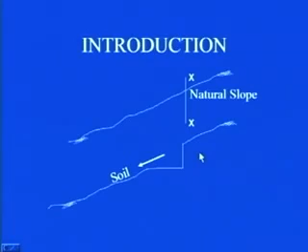Now let us see this. If I give there a retaining structure of this kind, then what is happening? The soil which was there above in this part is creating a lateral pressure which will be resisted by this retaining structure, and that is why it is called a retaining structure.

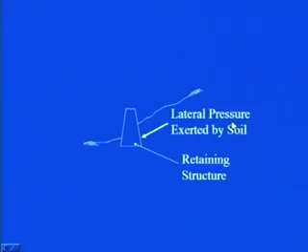So you see that this retaining structure will function properly in the case when this lateral earth pressure is estimated properly, because let's say the lateral earth pressure is very nominal, then we do not need to require such a big cross section of a retaining structure, and accordingly if its magnitude is higher, we have to go for a larger cross section so that the retaining structure will be able to take that much load without failing.

The stability is the only criteria which has to be taken into account. So that is why the estimation of this lateral earth pressure which is exerted by the soil becomes very essential.

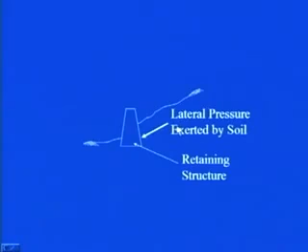Now, I will be using some technical terms from now onwards, so you must know exactly what I mean by those words. I will be using a term backfill. So the soil which has to be retained, that is the soil which is lying in this part by this retaining structure, I will be calling that backfill material or backfill soil.

Now, as we saw what is lateral earth pressure and why it is so important to estimate that properly, to summarize, the proper design of retaining walls, cantilever sheet pile walls, braced cuts and other similar structures require proper estimation of lateral earth pressure. So these are retaining walls or cantilever sheet pile walls, braced cut - they are all different types of retaining structures.

Now, before estimating, we must know on what parameters this lateral earth pressure will vary. So this lateral earth pressure is basically a function of type and amount of wall movement. You have seen that figure, the soil was trying to slide down, which will cause pressure on the wall. The wall will have the tendency to move either towards the soil or away from it. So the type and amount of wall movement taking place will affect the lateral earth pressure.

Then, shear strength parameters of soil. What do we mean by shear strength parameters is the cohesion and angle of internal friction. So depending on the property of the soil, the lateral earth pressure will be varying. Here what do we mean by soil is, as I explained, the backfill soil.

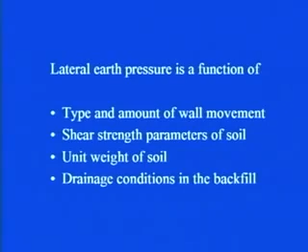As I told you, the wall will have a tendency to move upon the action of this lateral earth pressure, which will be exerted on the retaining structure by the soil. Now there can be three conditions: either the wall is not at all moving, or the wall can move away from the soil, that is away from the backfill, or the wall can move towards the backfill. Let us discuss one by one all these three conditions.

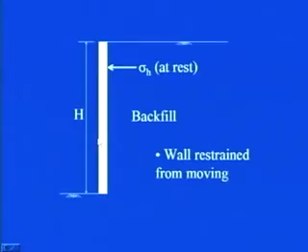First, the condition when the wall is at rest, that is not moving at all. You can see in this figure a retaining structure, and the soil which has to be retained is called backfill. If the height of this structure is h and the wall is restrained from moving, then sigma h is the pressure exerted by the soil on this retaining structure. Keep in mind the wall is not moving at all, it has been restrained, and this horizontal pressure or stress is called sigma h, which is at rest.

Now, the lateral earth pressure on the wall at any depth in this position is called at-rest earth pressure. Is this clear? In this condition, the wall is not at all moving.

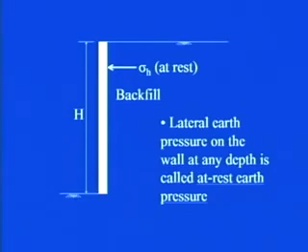So here, the wall may tilt away from the soil which has to be retained. This condition is called the active condition. A triangular soil wedge behind the wall will fail, and the lateral pressure in this condition is known as active earth pressure.

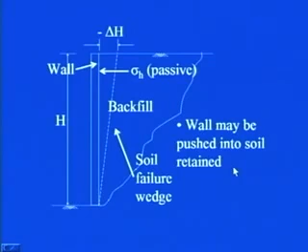So we discussed the condition when the wall is at rest, and the second condition when the wall is moving away from the soil. Now the third condition is when the wall is moving towards the soil. In the earlier figure the wall was moving away from the soil; in this case the wall is moving towards the soil, so the wall may be pushed into the retained soil. There may be various cases, which I will explain in subsequent slides.

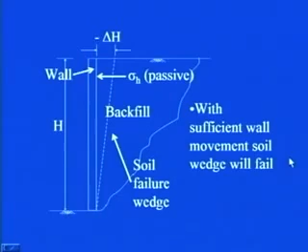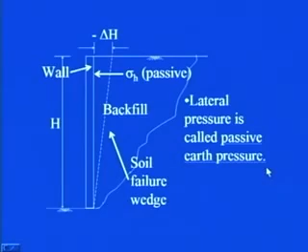In this case the wall is moving towards the backfill soil, and again I assume a triangular soil wedge failure is formed. With sufficient wall movement the soil wedge will fail, and the lateral pressure acting upon the wall or retaining structure by the soil in this case is called passive earth pressure.

Now, after knowing all these three types of lateral earth pressure which can act on a retaining structure due to the presence of backfill, let us analyze each case one by one, to see how exactly we can estimate the lateral earth pressure in these three different conditions.

First, let us look at the estimation of lateral earth pressure at rest condition. Here is the wall, and since it is at rest, it is not moving at all. If I take any soil element at a depth z from the existing ground surface, here is the backfill. If I take a soil element represented by this rectangular part at depth z, then due to the overburden of soil, there will be a vertical stress acting on this soil element, and correspondingly a horizontal stress will act on that element. This is what is called lateral earth pressure.

Now, how to estimate it? First of all, we fix the properties of this soil. So C and phi, those are the shear strength parameters of the soil.

As I told you earlier, the amount of lateral earth pressure depends on the shear strength properties of the soil. These come into picture along with the unit weight of the soil. The height of the wall is h in this case.

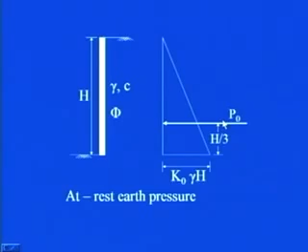This is the pressure diagram, and the total area of it gives you the total earth force. Since it is triangular, its resultant acts at h by 3 from the base of the wall. Now let us try to see what exactly is this K naught.

K naught is called the coefficient of at-rest earth pressure. Many research workers have found these values of K naught based on experiments, engineering judgment, and experience. Jaky in 1944 gave an expression for K naught, which is equal to 1 minus sin phi, where phi is the angle of internal friction.

This expression is for normally consolidated clay. For over consolidated clay, K naught over consolidated is approximately equal to K naught normally consolidated into the square root of the over consolidation ratio.

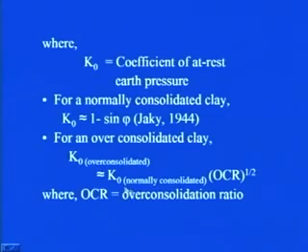I hope you know what exactly is normally consolidated clay and over consolidated clay, but to give you a rough idea: normally consolidated clay is the clay subjected to the maximum pressure in its history, and over consolidated clay has been subjected to more pressure as compared to its present condition in its history. This over consolidation ratio is K naught over consolidated by K naught normally consolidated, whole, squared from this relation.

Now how can we estimate the total force? We have already drawn the pressure diagram. If you take the area of that pressure diagram, you will be able to get the total force. So here we have the total force, which is P naught, and that will be per unit length of the wall.

It can be obtained from the area of the pressure diagram, which is this expression: P naught is equal to 0.5 gamma h square into K naught. As explained earlier, the location of the line of action of this from the bottom of the wall will be h by 3, where h is the vertical height of the wall.

Now we took a very simple case to make you understand what exactly we mean by lateral earth pressure at rest. Many times it may happen that the backfill soil is subjected to some surcharge, possibly due to the existence of some structure, a residential building or something like that. So here I discuss a case with lateral earth pressure in the presence of surcharge.

Here the surcharge, which is Q, has been applied. The condition is exactly similar, all things remaining the same, with only an additional parameter, this surcharge, added to the previous condition. Now let us see what will be its effect on the lateral earth pressure diagram, and subsequently the estimation of lateral force.

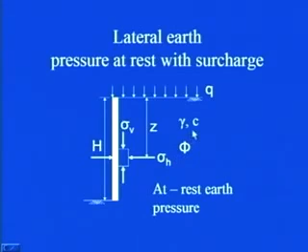If I take any soil element at a depth z from the existing ground surface, then sigma v is acting on this soil, and sigma h is also acting. The properties of the soil are C and phi: C is cohesion, phi is angle of internal friction. h is the vertical height of wall, gamma is unit weight of backfill soil, q is the uniformly distributed load at ground surface, and sigma prime is the effective normal stress.

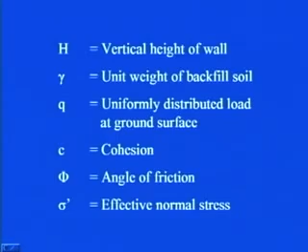Before finding the lateral earth pressure at any particular depth, we need to find the vertical effective pressure at that depth, because if you multiply the vertical effective stress by the coefficient of lateral earth pressure, it will result in the lateral earth pressure. So let us first see what is the vertical subsurface stress at any particular depth z.

Sigma v is equal to q plus gamma z, and the lateral earth pressure at rest, at that particular depth, will be k naught into sigma v prime plus u. Now where is this u coming from?

Here I have not taken into account the presence of a water table. In case of any water table, what will happen? Your total stress will be the sum of effective stress plus the pore water pressure. So this u represents that particular case, which is pore water pressure.

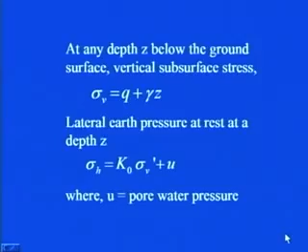So in the absence of any water table, just the surcharge has been added to the previous case as discussed earlier. What is going to be the difference? You see at this depth, that is at z equal to 0, your vertical stress is q.

Now if the vertical stress is q, and the wall is at rest position, what will be the horizontal stress? It will be k naught into q. So here at depth z equal to 0, we plot it to be k naught into q.

Now at depth z, that is at z equal to h, what will this be? Due to this surcharge, the vertical stress at this point, at z equal to h, is going to remain the same, that is q only. So the horizontal stress is also going to remain the same, which is k naught into q.

But due to this backfill soil, this additional part, this triangular part denoted here by area 2, will come into picture. At this depth your vertical stress is gamma h, and if you multiply that by k naught, that gives you the lateral pressure. So the total lateral pressure works out to be k naught into q plus gamma times h.

Now if I take the first one, denoted by this rectangular area, where will the resultant act? It will act at height h by 2. So here I am denoting it by P1. P1 is the force due to this rectangular area, denoted by 1, and this will act at a depth h by 2.

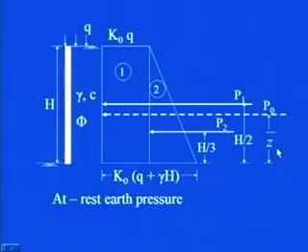So you see, K naught into Q into h, plus, in the similar manner as we discussed when the surcharge was not there, that is plus 0.5 gamma h square into K naught. And the location of the line of action of this force will be z bar. If you take the moment of all three forces about this point, what you get is P1 into h by 2 plus P2 into h by 3, that is equal to P naught into z bar. So from there you will be able to get the expression for z bar.

So this way you can find out what is the total force P naught per unit length of the wall, and its location also.

Now I further complicate the situation by saying that the water table is also present along with the surcharge. We are going step by step: first we saw that in the absence of any surcharge, only the wall and backfill soil were there, and we determined the lateral earth pressure at rest condition. Then we incorporated the surcharge. Now, as a third step, I incorporate the presence of the water table.

This figure shows the position of the water table, at a depth h1 from the ground surface, and the remaining depth is h2, where h2 is h minus h1, with z measured from here. When the water table is present, the soil below it becomes saturated, so its unit weight becomes gamma saturated below the water table, while above it remains gamma. I assume the backfill soil is the same above and below the water table. Now let us see how this affects the methodology for estimating lateral earth pressure.

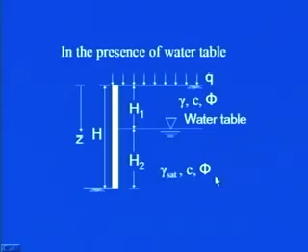Let us see what will be the effect of this water table on the magnitude of lateral earth pressure.

So here I am showing you the earth pressure diagram in which surcharge is present and the water table is also present. First, let's take the case above the water table. The vertical stress at z equals 0 is q only, so the horizontal stress will be K naught into q. I am showing it here.

What will happen at z equals h1? Due to this q, it will remain the same, so it comes as it is. But due to this particular backfill, this extra triangular portion comes into the picture, that is the second one. So what will be this total lateral earth pressure? This will be K naught into Q plus gamma times H1.

Now at this particular level, this will act as a surcharge, so it comes as it is till this point, and then the additional part due to the soil below the water table, of depth H2, this fourth part comes into picture, where we take into account gamma prime, the submerged unit weight, because it is below the water table. So the total amount becomes K naught Q plus gamma H1 plus gamma prime into H2.

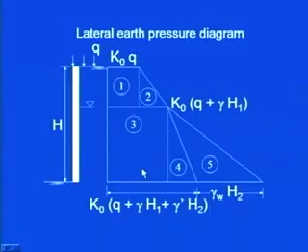See, this is the area of the first part, that is this one. What will be the area of this one? That is half into distance into this distance, okay, so that is here. Then again for the third one, this is K naught into Q plus gamma H1 into this height, that is H2. You see, I am writing this, and in the similar manner I get the two triangular areas for 4 and 5 respectively over here.

Now this was all about your lateral earth pressure in or at rest condition.

Now as we discussed there are 3 conditions: at rest, active earth pressure, and then passive earth pressure. So now let us try to have a look at active earth pressure, that is how we can estimate it. You must remember when this active earth pressure will come into picture: whenever the retaining wall is pushed away from the backfill soil, then your active earth pressure will come into picture. Now various research workers have given different theories to estimate this active earth pressure. Mainly 2 are used, that is Rankine active earth pressure and Coulomb's active earth pressure. Both have some advantage or disadvantage, one has some limitation over the other. We will be discussing all these aspects one by one.

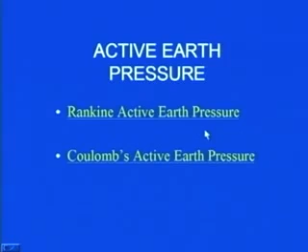So first let us try to see what do we mean by Rankine active earth pressure. So as we say that it is active pressure, you see the wall is moving away from the backfill. Rankine assumed that the rotation of the wall takes place along this point which is at the bottom of the wall, and the failure takes place along this failure plane, which makes an angle of 45 plus phi by 2 with the horizontal. So you see the failure wedge which is getting formed is triangular in nature, that is this one, and delta x is the wall movement away from the soil.

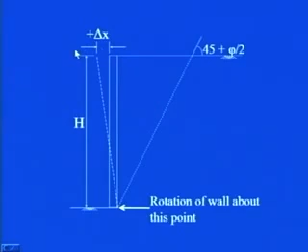So if we plot, let us say normal stress - you have already studied in your soil mechanics course what do you mean by Mohr circle. Now if I plot that Mohr circle, that is the variation of normal stress and shear stress. So you see, if I draw for different conditions the normal stress versus shear stress, we get a circle kind of thing. So at any particular depth, if sigma v is the vertical stress, k naught sigma v - I am talking here of active earth pressure.

You see, the wall was moving away from the soil. So at any particular depth z, if sigma v is the vertical stress, what will happen? As the wall - let us say in the first case the wall will not start moving spontaneously or instantaneously, so for the first case it will be at rest. So in that case what will be your horizontal stress? That will be simply, you have to multiply the vertical stress at that particular depth by k naught. So you see this Mohr circle A, which is the smallest one, is there, which is corresponding to the Mohr circle at rest condition, where the wall is not at all moving.

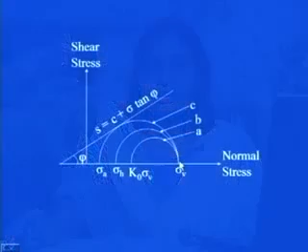Now when the lateral earth pressure started exerting on the wall by the backfill, what will happen? The wall will slowly start tilting away from the soil. So you see, at any particular tilt delta x, I say that this is the second Mohr circle, that the wall has started moving away from the soil. If sigma v is the vertical stress - see, vertical stress is not going to change at that particular depth - so accordingly, corresponding to that wall movement, your sigma h will be changing. So now sigma h will become some particular typical value, and that will be different from the sigma h at rest condition. So the Mohr circle will start moving in this particular direction.

As the movement of the wall increases, there will be one situation where the Mohr circle will touch this Mohr envelope. That means that as soon as it touches the Mohr envelope, the soil has failed. The equation of the Mohr envelope, which you already know, is S is equal to C plus sigma tan phi, where what is S?

S is your shear stress, C is your cohesion, sigma is normal stress, phi is angle of internal friction.

When the wall movement has increased enough that the Mohr circle corresponding to that condition touches the failure envelope, that condition is called the active condition. The horizontal pressure corresponding to that is called sigma A, the active earth pressure. Earlier it was at rest; as the wall movement increases, the Mohr circle shifts in this direction and attains a minimum value of horizontal stress just before failure, which is the active earth pressure.

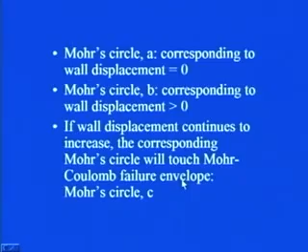I hope that is clear. Please make sure this mechanism is very clear to you, otherwise you will get all types of confusion.

I'll repeat it again: the first Mohr circle corresponding to sigma V and K naught sigma V is the lateral earth pressure at rest condition, when wall displacement is 0. As wall displacement increases, meaning the wall moves away from the soil, the Mohr circle shifts, and a condition comes where the circle touches the failure envelope. That condition corresponds to the failure condition, and the corresponding lateral earth pressure is known as active earth pressure.

Mohr circle C represents the failure condition in soil mass, with corresponding horizontal stress sigma A, where A stands for active condition. This is referred to as Rankine active pressure.

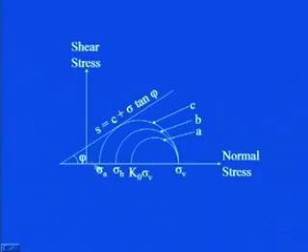In a Mohr circle, two extremes correspond to major and minor principal stress. In this active condition, the major principal stress is sigma V and the minor principal stress is sigma A, the earth pressure corresponding to the active condition.

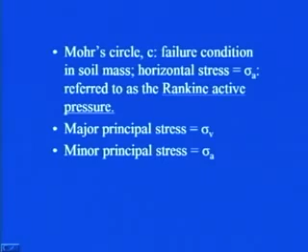As you learned in theory of elasticity at first year level, there is a relation between major and minor principal stress. From that principle, we get the expression for sigma A as sigma V tan square (45 minus phi by 2) minus 2c tan(45 minus phi by 2), which can be simplified as sigma V into Ka minus 2c square root of Ka, where Ka equals tan square(45 minus phi by 2), known as the Rankine active earth pressure coefficient. Just as K naught was the lateral earth pressure coefficient at rest condition, this Ka corresponds to the active earth pressure coefficient, specifically the Rankine active earth pressure coefficient since we are discussing Rankine's theory.

Now, how do we draw the lateral earth pressure diagram? It's always better to draw the earth pressure diagram first, because then problems become simple: you just take the area of the diagram to get the total force per unit length of the wall, and once the area is known, you can find where the different forces act and determine the line of action of the resultant force. So we try to develop the active earth pressure variation with depth in case of Rankine's active earth pressure.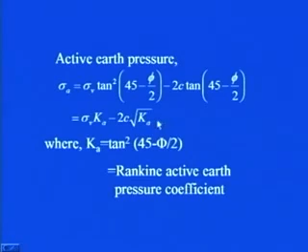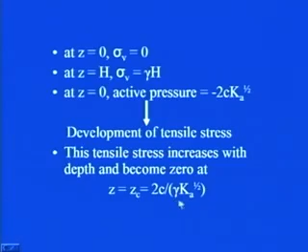Now how am I writing this zc is equal to 2c by gamma square root of Ka? You can see here that your sigma a is equal to sigma v Ka minus 2c square root of Ka. If you substitute this to be equal to 0, and sigma v at z is equal to zc will be gamma into zc, and from there you will be able to get this expression for zc is equal to 2c by gamma square root of Ka, where this Zc is known as the depth of tensile crack. Tensile stress in the soil causes a crack along the soil wall interface.

So you must understand the physical interpretation of active earth pressure becoming 0 at any particular depth. As soon as it is becoming 0, that means above that level there is a development of tensile stress, and so there will be an occurrence of crack on soil and wall interface. That is what we mean by the occurrence of tensile crack. Then there can be two kinds of situations: one just before the occurrence of the tensile crack, and another after the occurrence of the tensile crack.

So first I discuss the Rankine force per unit length of the wall before the occurrence of tensile crack. We were taking the area of the earth pressure diagram to find out the forces. If the area is not well defined, or it is a function of a particular depth, what do we do? We integrate it.

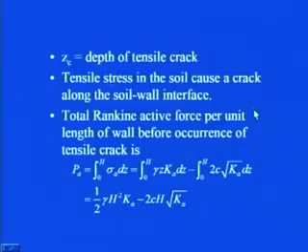So whatever stress occurs after the tensile crack will be equal to the pressure acting on the wall between z equal to Zc and z equal to h. So when finding the Rankine force per unit length of the wall after the occurrence of the tensile crack, we just take into account the earth pressure diagram between depth z equal to Zc and z equal to h.

This is simply expressed as Pa equals h minus 2c upon gamma square root Ka into gamma h Ka minus 2c square root of Ka. Now you must be wondering where this comes from - it's simple. I have just taken the area of this part: half of this length, which is h minus Zc, into the base width of this triangular wedge, which is sigma v Ka minus 2c square root of Ka.

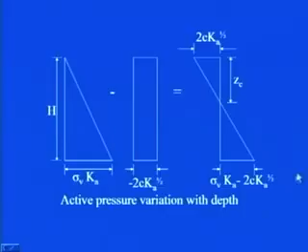What is sigma v at this particular level? It is gamma into h. So that is gamma h Ka minus 2c square root of Ka. You see, exactly the similar thing, h minus Zc - I showed you earlier how to find that, which is 2c by gamma square root of Ka, into gamma h Ka minus 2c square root of Ka. This is how we find the active force due to the movement of the wall away from the backfill soil, as given by the Rankine theory.

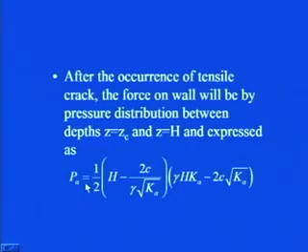Now this theory can also account for the case where the backfill surface is not horizontal, but inclined with the horizontal. Let us have a look at that. So for Rankine active earth pressure with inclined backfill, I assume, as usually adopted in practice, that the backfill soil is cohesionless - that is, purely cohesionless, so C becomes 0. Only phi comes into picture as far as the shear strength properties of the soil are concerned.

So for cohesionless backfill soil, C becomes 0, only phi remains. For inclination of the backfill rising at angle alpha, the only change in the expression is that the active earth pressure coefficient becomes cos alpha into cos alpha minus square root of cos square alpha minus cos square phi, divided by cos alpha plus square root of cos square alpha minus cos square phi.

Earlier what was that? That was simply tan square of (45 minus phi by 2), in case of horizontal backfill. But now when the backfill is inclined at an angle alpha, your Ka expression will become this.

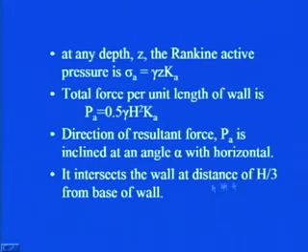The direction of this resultant force Pa will be inclined at an angle alpha with the horizontal, and it intersects the wall at a distance of h by 3 from the base. So as shown in this figure, Pa, the total force in case of an inclined backfill, acts at a distance of h by 3 from the base of the wall, and is parallel to the inclination of the backfill.

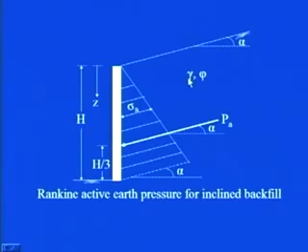So you see with depth how it is changing, and what value it attains at Z equal to h, along with the soil properties gamma and phi.

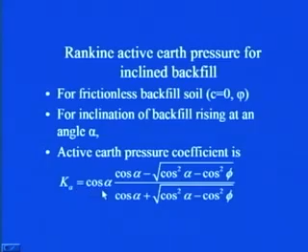Now, this is a very tedious kind of expression, so standard tables are available in standard textbooks which give the value of Ka for different values of alpha and phi. I will show you some typical values in tabular form.

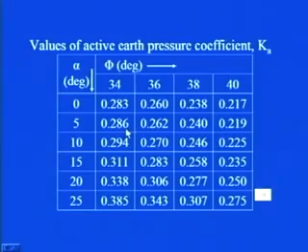All these are in degrees, and since Ka is a coefficient, it is a non-dimensional parameter. If you know the value of alpha, the inclination of the backfill, and the property of the soil, phi, since C is 0 as we assumed frictionless soil...

...then you can simply pick the value of Ka from these standard tables and put it into the expression for total force per unit length of the wall, to get the magnitude of the Rankine active force per unit length of the wall, which will act at a depth of h by 3 from the bottom of the wall.

So today we saw what exactly we mean by lateral earth pressure, how it occurs, how it affects nearby structures, why we need to estimate it properly, and how it affects retaining structure design. We saw three conditions: wall at rest, wall moving away from the soil, and wall moving towards the soil, that is, active and passive conditions respectively.

We saw how the analysis is carried out for determination of lateral earth pressure at rest condition, and then started with estimation of lateral earth pressure in active condition. I mentioned there are two commonly adopted theories: Rankine active earth pressure, and Coulomb's active earth pressure condition.